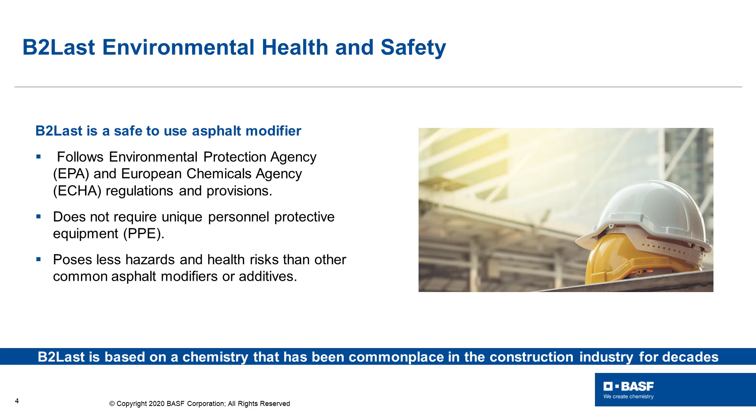Before I hand it over to Bernie to discuss the functionality and benefits of B2Last, it is important that we highlight relevant environmental health and safety information. B2Last is a safe-to-use asphalt modifier that utilizes chemistry that has been leveraged in the construction industry for decades. It follows all EPA and ECHA regulations and provisions, does not require unique PPE, and is less hazardous than other common asphalt modifiers and additives. And with that, the floor is yours, Bernie.

Hello everyone. Thank you for taking the time out of your busy schedules to get an overview of B2Last and how it can help you meet both high polymer and standard polymer modified asphalt specifications while both reducing your total cost of production and keeping viscosity at workable levels. My name is Bernie Malonson and I am BASF's North American Marketing Manager for B2Last.

Now a great deal has happened since we released B2Last into North America in the summer of 2020 at the Petersen Asphalt Research Conference. At this time, the global COVID-19 pandemic continues to be a major disruptive force, and the industry remains subject to multiple challenges, whether that is due to budget cutbacks, delayed paving projects, or the need to simplify your operations in order to become more efficient and reduce your overall cost structure.

However, BASF believes within every challenge there is opportunity. BASF is the world's largest chemical company, and although the asphalt industry has traditionally known BASF in North America as a supplier of styrene-butadiene rubber and other SBR latex products used in our asphalt dispersions and emulsions line of products, that is just one segment of our overall construction portfolio and one area of the chemistry that we participate in. BASF has multiple products and technologies with proven track records used in related construction industries that we have drawn from to bring new solutions to the asphalt marketplace to deal with cracking, stripping, and rutting issues. This simplifies your formulations and reduces your total cost of ownership and production while meeting current and future specifications.

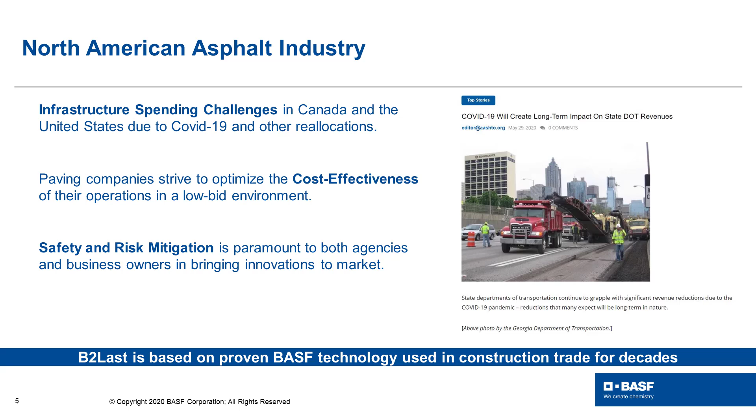BASF would like to introduce you to our game-changing asphalt modification technology, B2Last. B2Last brings multiple functional improvements to asphalt binders and mixes in a way that no other single modifier can. One of the best analogies we have come up with is that B2Last brings a Swiss Army knife of functionality and process improvements throughout the entire asphalt value chain. Our Senior Asphalt Technologist, Brian Orr, will speak more on this in just a few minutes.

B2Last results in simpler formulations by reducing the number of modifiers and additives needed. It can be produced faster than SBS concentrates, which reduces missed opportunities to fulfill orders. And a surprising finding has been that B2Last ties up and reduces hydrogen sulfide gas emissions, further reducing the cost and need for additional H2S scavengers.

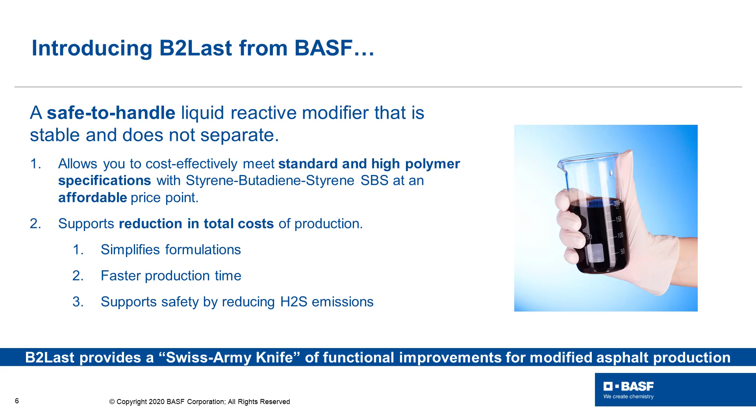With over half a decade of development, asphalt binder and mix testing, and ongoing paving trials, B2Last is an extremely safe to handle liquid modifier from BASF. Over the past several years, our team has quietly been partnering on research projects with groups such as the Texas Transportation Institute (TTI) at Texas A&M, the Western Research Institute (WRI) in Laramie, Wyoming, Blankenship Asphalt Tech and Training in Kentucky, and most recently the National Center for Asphalt Technology (NCAT) at Auburn, which Brian will update you on in a little bit.

B2Last supports current AASHTO specifications for both high-polymer and standard polymer modification. When formulated with styrenic block copolymers, most specifically Styrene-Butadiene-Styrene (SBS), B2Last can simplify your formulation while keeping viscosity below 3,000 centipoise. BASF has developed a safe and repeatable process for using B2Last in the asphalt industry with no disruption to existing processes.

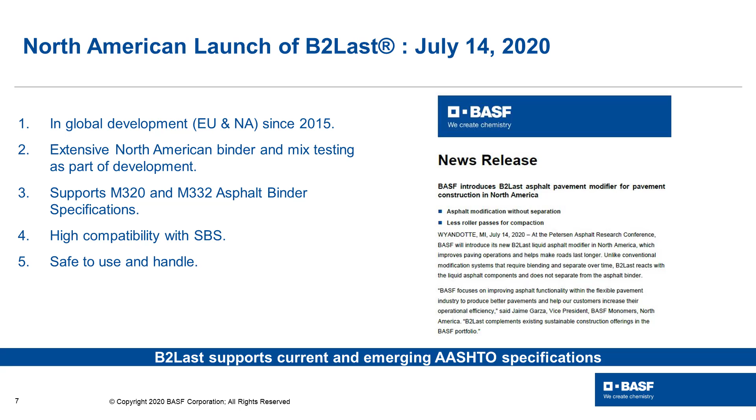In the multiple years and thousands of hours that we and our partners have handled the product in the industry, there have been zero mishaps and no safety violations. It is extremely safe to use.

The secret to what makes B2Last such an exciting and effective tool for modifying asphalt binders is the reactive nitrogen, carbon, oxygen (NCO) molecule used in the formulation. This reactive molecule lets B2Last bind with the asphaltenes in the liquid asphalt binder, improving its functionality at a molecular level in a way a blended product simply cannot.

Although the asphalt industry has begun investigating reactive chemistries such as epoxies and terpolymers, research into NCO reactions in asphalt has been sporadic. NCO groups are the reactive material used as a building block in polyurethane chemistry, with the ability to improve the functional characteristics of asphalt binders and mixes.

This foundational chemistry is used by BASF to bind crumb rubber in running tracks, or wood particles in engineered wood products, such as oriented strand board (OSB), for example. BASF has used its expertise to adapt a well-understood area of chemistry used in other engineered, manufactured, and constructed products to the needs of the asphalt industry.

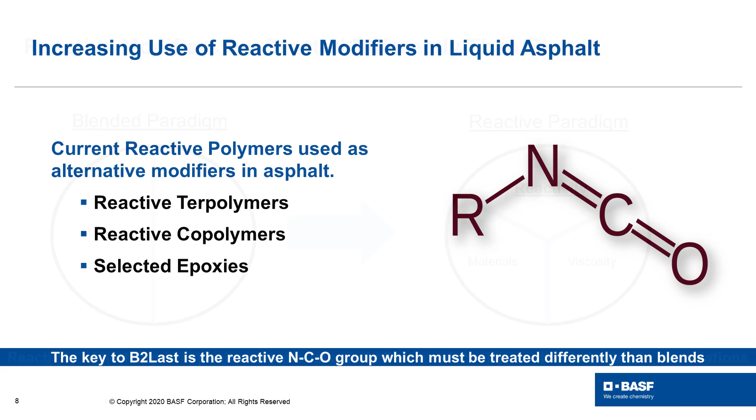One of our key findings over the past few years is that you cannot just drop a reactive modifier into the asphalt binder and treat it as a blend. In traditional formulations, you're blending materials and managing the viscosity. In comparison, in a reactive formulation, you have to balance the reaction against the materials and the viscosity. So it's by understanding these three variables and how they relate to each other that lets you do some interesting and amazing things. As you know, every asphalt is different, and different asphalts have different levels of reactivity.

So there is some initial evaluation required to determine the amount of B2Last needed to meet a specific performance grade. However, you need less B2Last than SBS to achieve similar results. Typical replacement ranges and ratios range from 2% SBS equaling 1% B2Last to 3% SBS equaling 2% B2Last. Once you understand the reactivity of your asphalt binder, you can actually balance your formulation to deal with rutting, stripping, and cracking at the same time. So instead of a balanced mix design, it's a balanced formulation design.

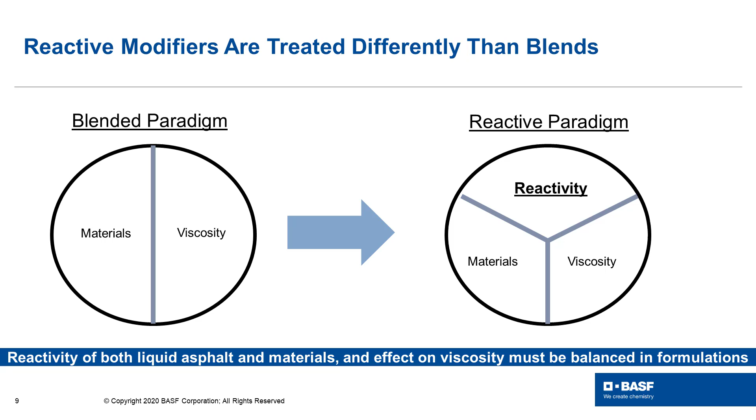Now, in the next section, Brian will give his perspective on the value of formulating with B2Last. Brian, the floor is yours.

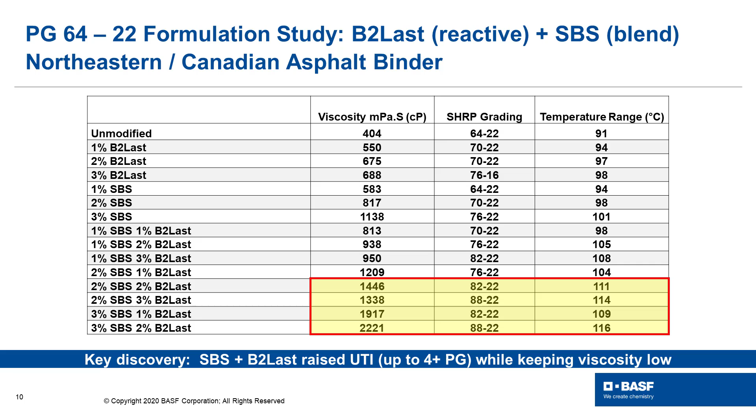Thanks, Bernie. Based on some of the initial results that BASF had, they reached out to a prospective customer from Canada to get a binder with varying levels of SBS for evaluation. These were provided based on the supplier's proprietary formulas, so we can't say whether they were using a linear or radial polymer. But as you can see highlighted in yellow on the slide, the combination of SBS and B2Last modification produced a grade bump of 4 PG grades, taking a 64-22 to an 88-22, while maintaining a viscosity well below 3,000 centipoise. This immediately piqued our interest in further studying the synergistic effects of SBS and B2Last.

One potential limitation we are aware of is the test for conventional polymer modification may not actually be picking up the full functional improvements of B2Last modification. This is due to the type of material we're using. B2Last is not a rubber or solid that requires mill time. The reactivity of B2Last forms a network similar to a super ball or bouncy ball rather than the typical elastomeric network noted with SBS. For example, we have been challenged that we are simply stiffening the asphalt and potentially increasing cracking. However, as stated earlier, we are stiffening like a solid rubber ball and can be stiff and flexible at the same time. In separate cracking tests, we have found that we do not harm cracking, especially when used in conjunction with SBS. More to come on future slides on this subject.

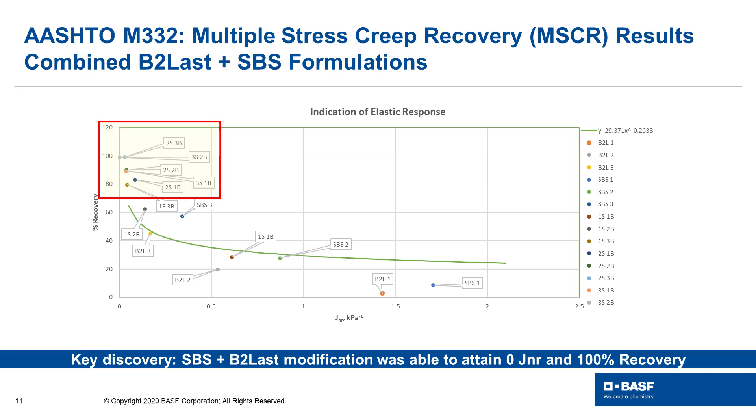In order to better understand the effects and benefits of B2Last modification, we had to learn to think about asphalt modification differently than your typical modifiers. For example, we were dealing with a liquid modifier that does not increase modified asphalt viscosity to the level of today's solid modifiers. As a reactive substance, it bonds molecularly with the asphalt molecules and is storage stable.

Essentially, when modified with B2Last, you turn asphalt into stiffer asphalt. There's no notable change in the molecular structure. We have conducted testing noting that B2Last only modifiers are completely stable and have zero separation.

We tested separation tubes over the course of 2 months in the lab to see what would happen, with no separation occurring. In some of the field trials we did, we ended up storing material for upwards of 3 weeks in inclement weather and had zero separation in those cases as well.

Finally, the material imparts elastic functionality in a different manner—much more like a super ball rather than a stretchy rubber band. So you can see you have a higher coefficient of restitution due to the nature of B2Last. It's not elastic like a rubber band, but more like it can deform and then 100% recover.

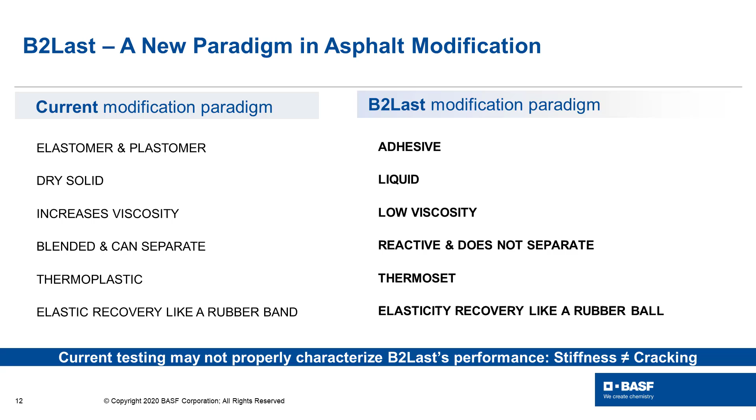This further underscores our statement that B2Last modified binders are much more stable and do not separate like SBS only modified binders can. This also lends to the idea that using SBS in conjunction with B2Last will reduce separation and storage stability issues.

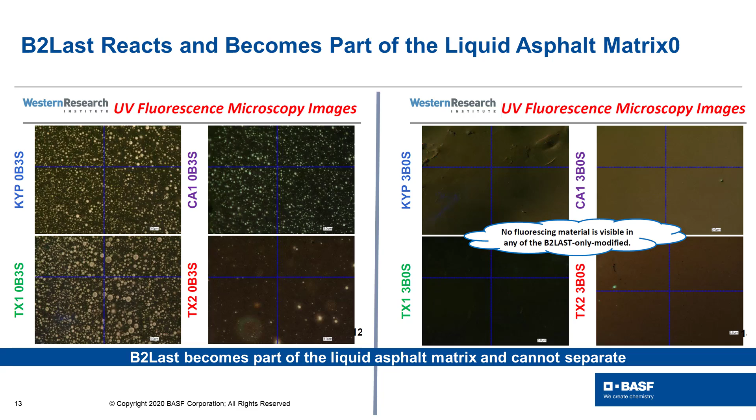Earlier this year at the TRB in Washington, D.C., we were challenged by some transportation officials to look beyond today's specification and see how far we could actually push the technology and improve both the low and high ends of the binder. In this research, we chose 3 different binders that have different levels of reactivity.

From the lowest to the highest, these are the MW1, a Midwest binder, a Southern binder, and then MW2, which is another Midwest binder that has a much higher reactivity level.

We held the SBS constant at 4% while varying the BASF modifier from 2% up to 3% with the addition of extender oil. One key thing to note from these formulations—they can be varied to get different results. The key thing with this was to heavily modify, check results, and testability.

We wanted to ensure that we were well below the viscosity range, or at the 3,000 centipoise maximum. We also wanted to make sure that as we looked at the binder, it was actually usable.

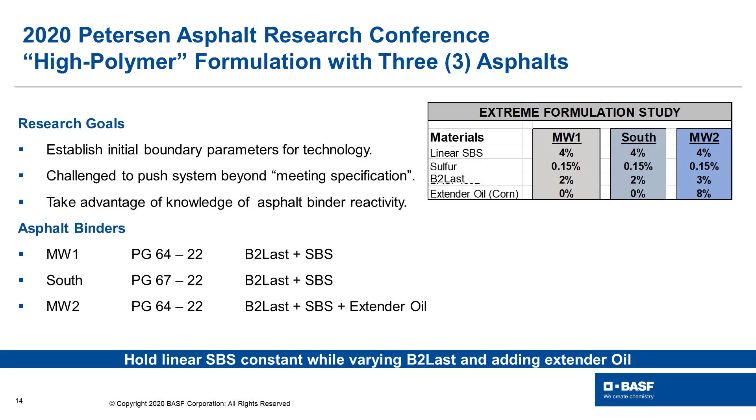Previously, we had only expanded 4 PG grades with the UTI of 116 degrees. In this study, we wanted to see if we could expand to 5 PG grades, and we did.

The Southern binder, which was originally a 67-22, or a 64-22 for pretty much everywhere else, graded out as a 98-26 with a UTI of 124.4. Although the viscosity did increase above 3,000 centipoise, this can be managed. Again, varying levels of SBS or B2Last can bring this viscosity under 3,000 centipoise very easily.

In our opinion, the Midwest binder was the most exciting. In this case, we saw a similar UTI increase to 124.2. However, we also were able to lower the bottom end with an extender oil and keep the viscosity below 3,000. All of these formulations are extremely stable and the results reproducible.

Another path of research that can be conducted, and will be in the future, is use of radial polymers in conjunction with linear SBS and B2Last, or radial and B2Last alone. Using those types of SBS could potentially reach the higher modification levels easier.

Each of these tests and formulations show excellent results with respect to elastic recovery and MSCR percent recovery as well. Likewise, using radial polymers in a formulation would likely bring the recovery numbers even higher. I also want to comment that each of these materials looked good. As many of you know, when you highly modify asphalt binder, you begin to see a thickening or sludge formation occurring. This is not the case with regular SBS and B2Last modified binders.

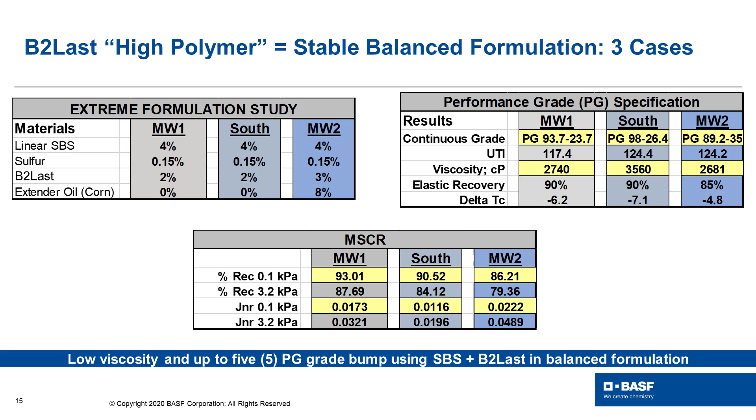As I alluded to earlier, we began to be curious about the cracking resistance of B2Last modified binders. As I presented at AMAP back in February of this year, we saw a very good improvement with the ideal CT index numbers on our first field trials, with just B2Last used in the blend.

To begin researching this, we contracted with Blankenship Asphalt Tech and Training. Ideal CT index numbers are highly susceptible to low end temperature variations, meaning the lower your PG grade, the better your CT index number should be. Because of this, we opted to formulate the binder to keep the low end temperature within 1 degree on all formulations. This would enable us to compare the ingredients rather than just the test results.

The 4 formulations used were a control, just B2Last, just SBS, and then B2Last plus SBS. Due to the synergistic effect of B2Last with SBS, we couldn't keep the upper end numbers the same. The interesting thing to note, however, was the much higher CT index numbers from the SBS plus B2Last. Further research, including stress and fatigue, is being conducted on these binders to better quantify this phenomenon. Thus far, our research shows that when using B2Last in conjunction with SBS, cracking resistance is significantly improved over the individual components.

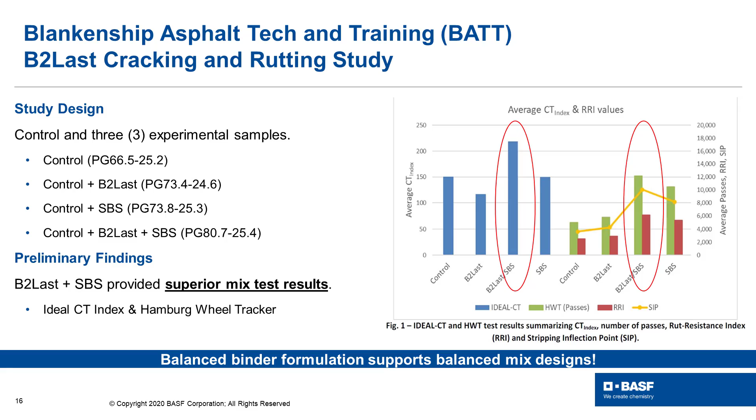Over the course of the last 2 years, we've conducted multiple field trials. These trials were conducted in Germany and at 2 separate locations in the Midwest. Each in the US used different binder sources and required different specifications to be met. The goal of these trials was, A, to prove operational feasibility. We, of course, did not want to attempt to use a product without ensuring it will work throughout the value chain. I, for one, did not want to attempt to pave a road and then have a catastrophic failure occur, like a gelled tank or a solidified mix in a truck or something of that nature.

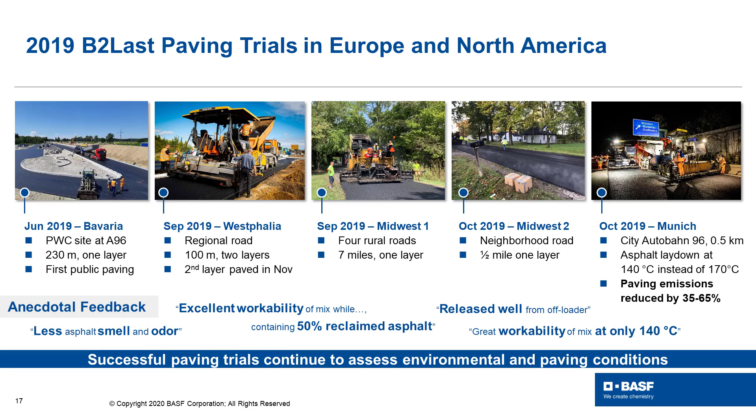B, we wanted to gather data in regards to mixing, compaction, and other anecdotal findings. As you can see on the slide, we were able to gather quite a bit of this data, which led us down a few other paths of research. C, pave in different climate and traffic regions in an attempt to diversify the type of data we would gather over the course of the next few years.

From the previous trials and from experience, we knew we wanted to start an accelerated testing process. We partnered with NCAT to do a phase 1 study, getting a B2Last modified binder on the ground where NCAT can start to evaluate this mixture at a level above regular binder and mixture testing. In early 2020, NCAT was paving the off-ramp to their test track. BASF formulated a binder with B2Last only, meeting M320 76-22 grade asphalt.

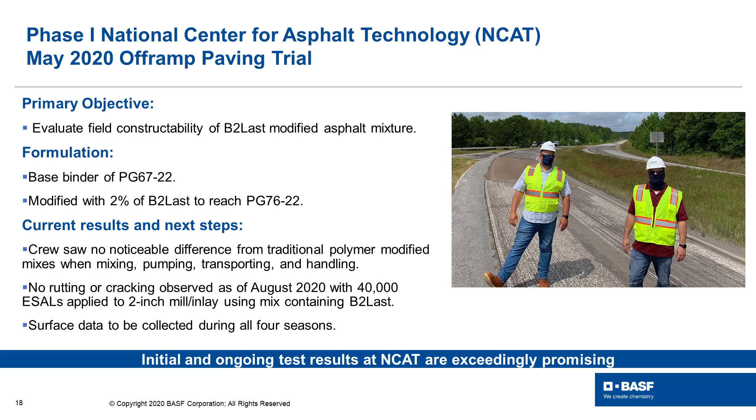Testing is ongoing for this section, but thus far the results are promising. No abnormalities were noted in production of both the binder or the asphalt mix. We're looking forward to working with NCAT on more testing and analysis of B2Last modified binders.

So what does B2Last do for you? It is a quick and easy method for modification. With a 6 to 8 hour reaction time, it can significantly reduce the amount of time it will take to batch material. With the ability to reduce cracking potential and increase fatigue resistance, your SBS usage can be reduced. This will lead to flexibility in production and the ability to service customers on short notice.

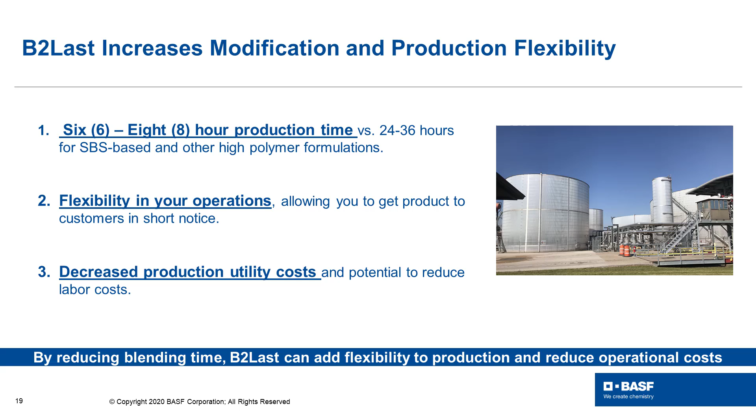With the reduction in production time, your utility, maintenance, and labor costs will be significantly reduced. To put this in perspective, if you can increase your fatigue resistance, lowering your SBS percentage needed, if you are a plant that makes concentrate blends, this has the ability to reduce the amount of concentrate needed. Reduced concentrate equals reduced mill time.

As I previously stated, the reduction in cost when using B2Last is partially based on the large cost of mill time. With the ability to simply inject B2Last into a tank and allow it to mix with little oversight, it is very beneficial to terminal operations.

Some of the anecdotal findings in our trials showed that you can reduce the amount of release agent needed in the bed of a truck. Also, since this is an adhesive, you could potentially save on the usage of anti-strips.

When working as an operations manager, one of the largest concerns I had was odor and H2S. I spent thousands of dollars on H2S scavengers and odor masking agents. With the majority of these chemicals, the rheology of binder is damaged when you use them. This created a compensation effect, increasing cost and increasing the amount of modifiers you needed.

We have found that the usage of B2Last works as a scavenger and reduces the amount of H2S in the headspace of a tank. It was noted in the trials that there was a significant decrease of asphalt odor while paving.

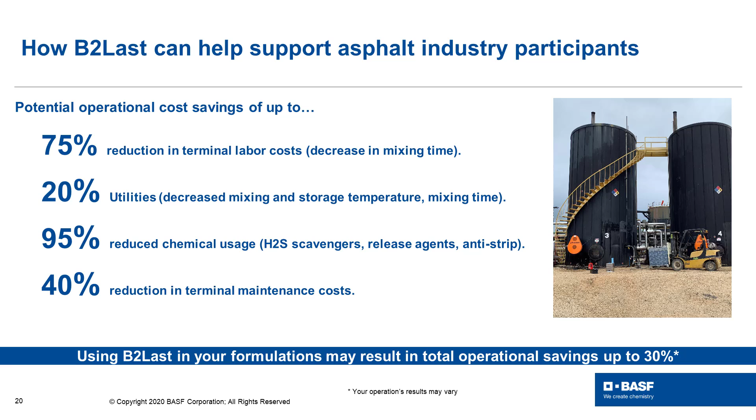Further testing to quantify and verify this is underway. What this means, however, is that with the use of B2Last, you now have an additive that will modify your binder, helping the rheological properties and reduce or eliminate H2S.

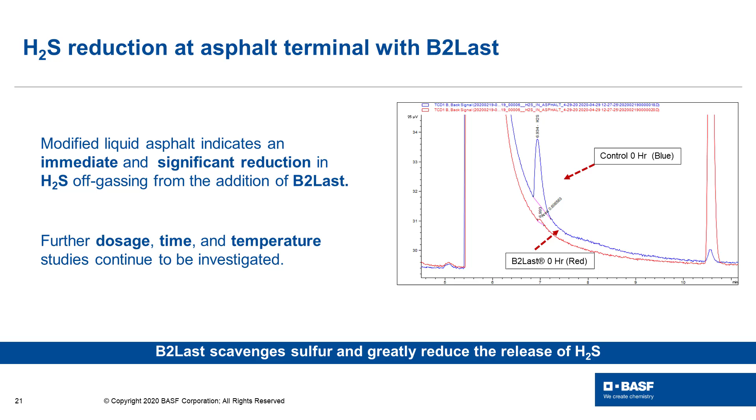Brian, thank you for that technical overview. As I mentioned earlier, during development of B2Last, we realized that it impacts multiple processes and supports efficiencies throughout the asphalt value chain. However, you can really see the savings within your asphalt terminal operations.

As excited as we are about the ability of B2Last to build better flexible pavements, we've always realized that in addition to superior performance, implementing B2Last also has to make business and economic sense. While we understand every operation is different, in the last year we developed our total cost of ownership calculator to help customers and clients model and forecast potential pockets of savings when you implement B2Last. For example, the calculator can model potential savings in labor, energy, as well as reductions in the use of other modifiers and scavengers that are no longer needed.

Our team is willing to work with your business managers and analysts to walk you through the model, and where it makes sense, import your team's actual data and values into the model to provide a customized forecast for you. The calculator lets you conduct a side-by-side comparison of your cost structure before and after B2Last implementation. Now we're prepared to help your business and financial teams forecast projected savings to help you make an internal business case for the technical, operational, and financial impact of implementing B2Last within your operations.

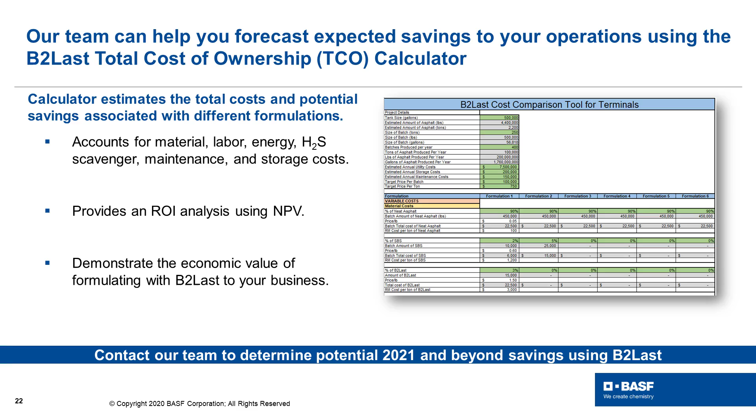Our goal is simple: to support your efforts to gain executive sponsorship for an internal evaluation and trial of how B2Last can not only make superior binder formulations, but also contribute directly and impact your bottom line profitability. Again, the BASF team has identified how B2Last improves operations and functions throughout the entire asphalt production and value chain.

For DOTs, there is no requirement to change specifications. We are fully compliant with EPA recommendations, and we support sustainability initiatives via life cycle cost assessments and environmental product declarations, or EPDs. For asphalt terminals, your facilities can see savings and efficiencies in formulations.

You can eliminate the potential for modifier separation in the binder, rapidly produce the material, and increase your safety due to our ability to mitigate hydrogen sulfide, or H2S, emissions. Finally, for the mix plants and paving crews, the material compacts in fewer passes, and it releases from truck beds and hand tools easily, requiring less release agents, and it supports reduced stripping, rutting, and cracking.

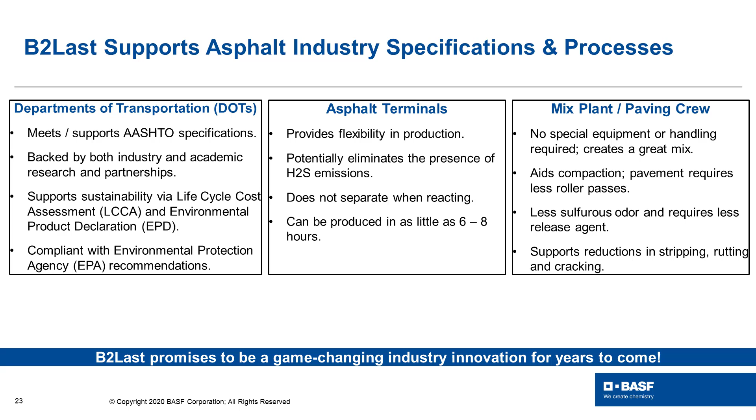Now, we can talk to you and share data that supports what we are seeing in the laboratory and paving trials for hours. However, now that B2Last is available for you to sample and evaluate, our goal is for you to see the benefits of B2Last modification and formulation for yourself. BASF wants to earn your business and be your supplier of choice for asphalt modification.

As I mentioned at the beginning, times of challenge are also times of opportunity, and we believe B2Last can help your operations and processes become more cost-effective, while at the same time helping you compete better in the marketplace. Whether you are a regulatory agency or a commercial participant, we believe it is in everyone's interest to create sustainable innovations that deliver economic value while upgrading our road infrastructure and ultimately saving the taxpayer money.

This concludes my portion of the presentation. I'll hand it back over to Trad Kirkland for some final comments, and both Brian and I will be available to answer your questions during the Q&A segment of today's webinar.

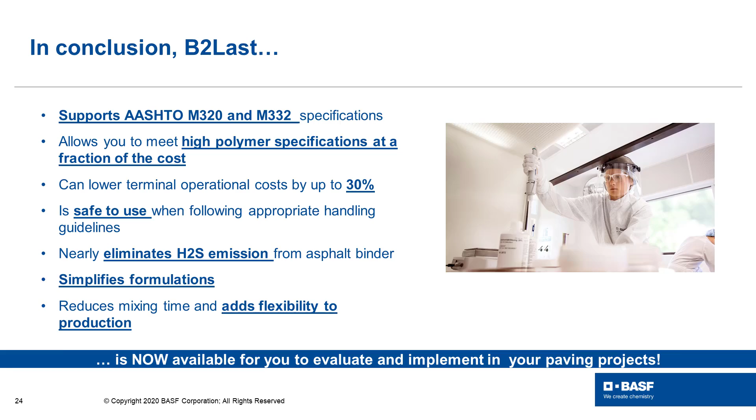Thanks, Bernie. So now you're probably wondering, how can I get started? First, email us or visit the Contact Us section of the B2Last NA website and enter your information. After you provide us with a liquid asphalt sample, BASF will assess binder reactivity and the initial formulation.

Second, B2Last technical teams will provide environmental, safety, and health training and provide a B2Last sample for your evaluation. Third, B2Last technical support will conduct a total cost of ownership evaluation and site survey to identify potential cost savings and provide options and recommendations for your B2Last implementation.

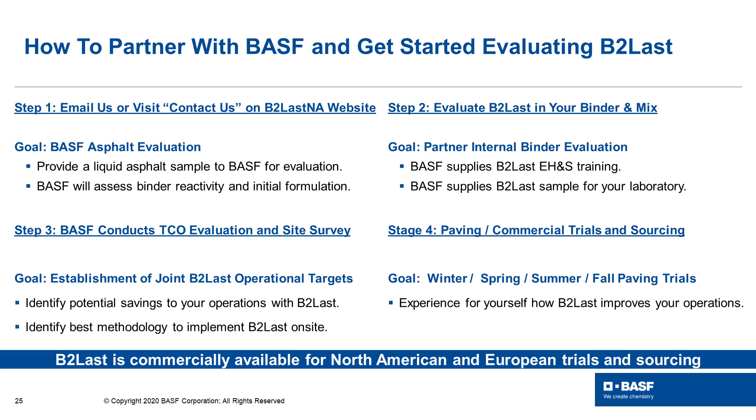Finally, the B2Last team will work with you to support your commercial paving trials with B2Last and support ongoing sourcing of B2Last for your operations.